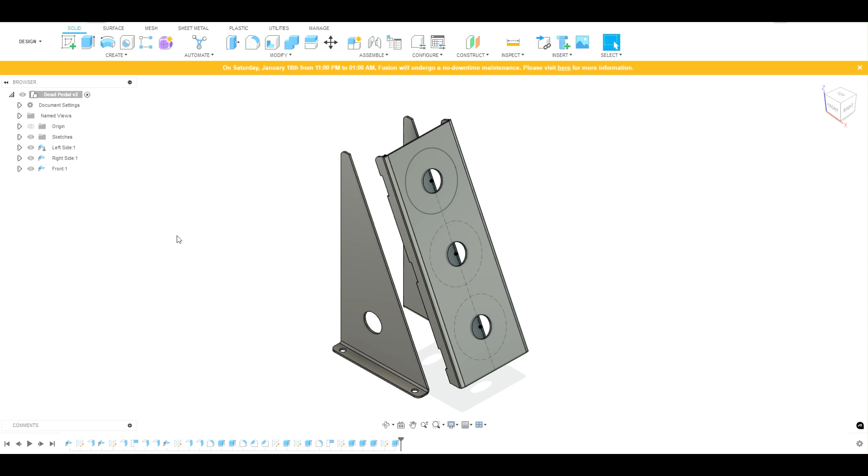All right, so we're going to unfold all of these pieces. What we have to do first is go through every one of them. Click on the component that you want to start with, make sure you're in the sheet metal tab, modify, unfold, okay?

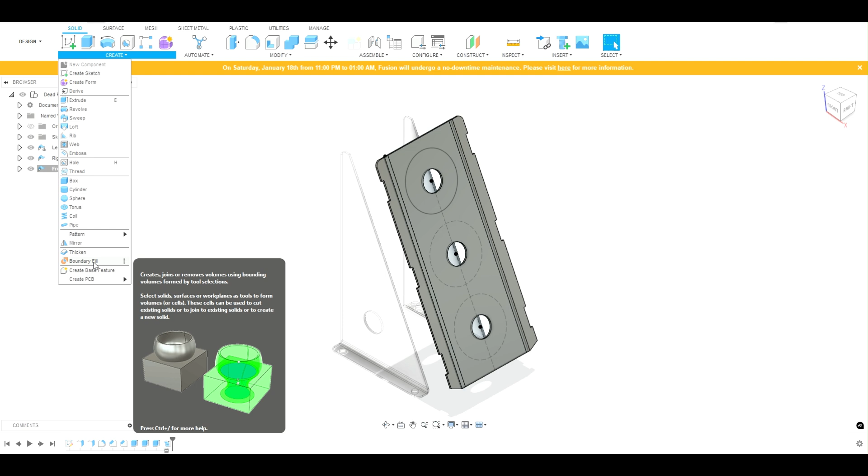Then we have to go over to solid, click on create, boundary fill, highlight the component, click it. Now we have to select the cells, create new component, hit OK. This will be the first component, right?

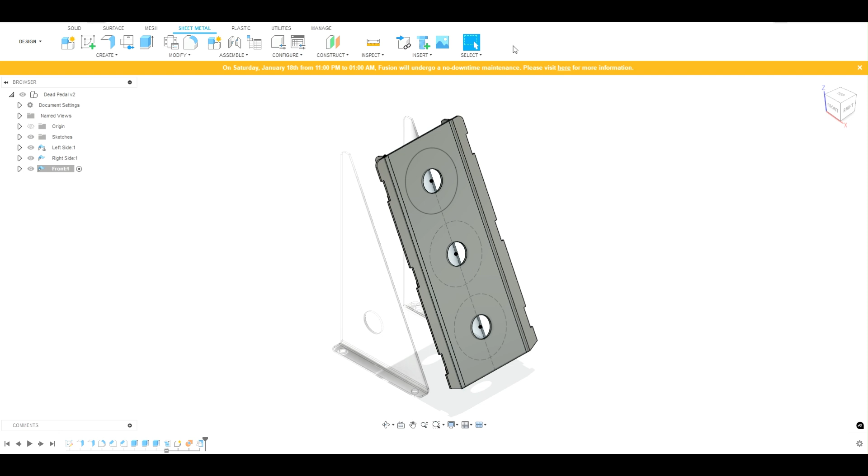Go back to sheet metal, refold the faces, otherwise it'll complain later. Then we're going to go on to the second component. We're just going to repeat this process 3 times, right? So back up to sheet metal.

We're going to go to modify. Sheet metal, modify, sorry about that. Unfold. Unfold all bends, select component.

Go back to solid, boundary fill, highlight the component, select the cells, not remove tools, hit OK, or new component, hit OK. Back to sheet metal, refold.

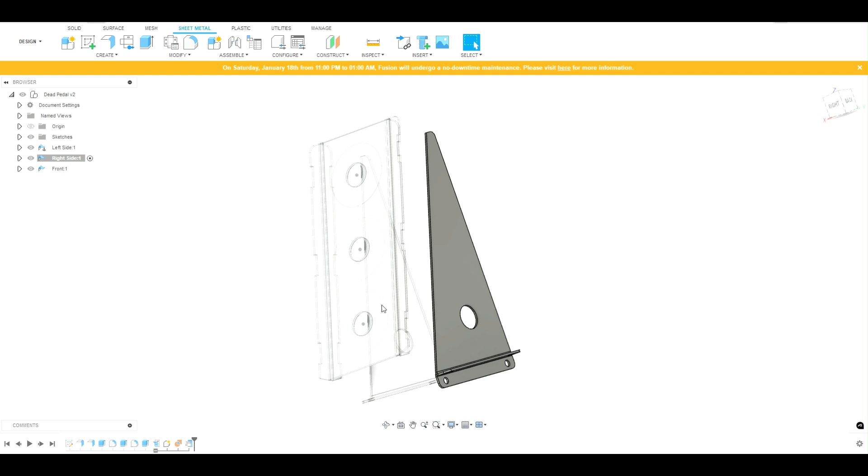And we're going to go on to the third component. Highlight that, go to sheet metal, modify, unfold. Click on the surface that you want stationary. Make sure all the bends are highlighted.

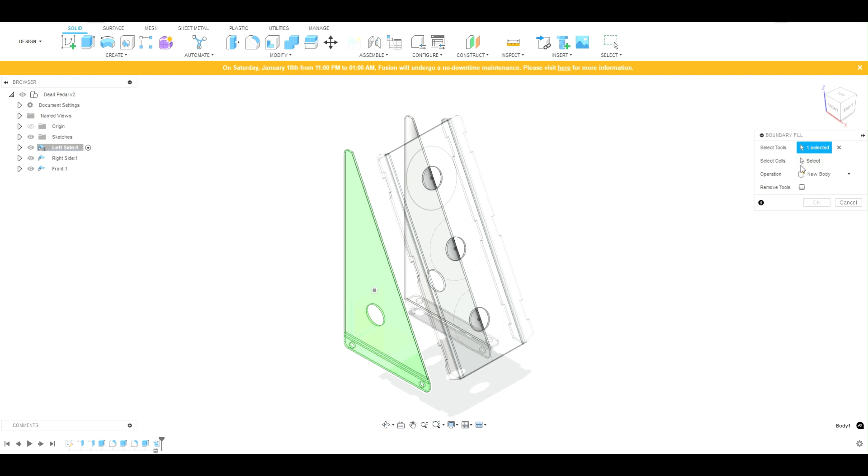Go back to solid, create, boundary fill, select the component, select the cells, create that into a new component.

There, okay. Now what I want to do here actually is go back, first refold the faces. I want to go back and, there's two pieces on each one.

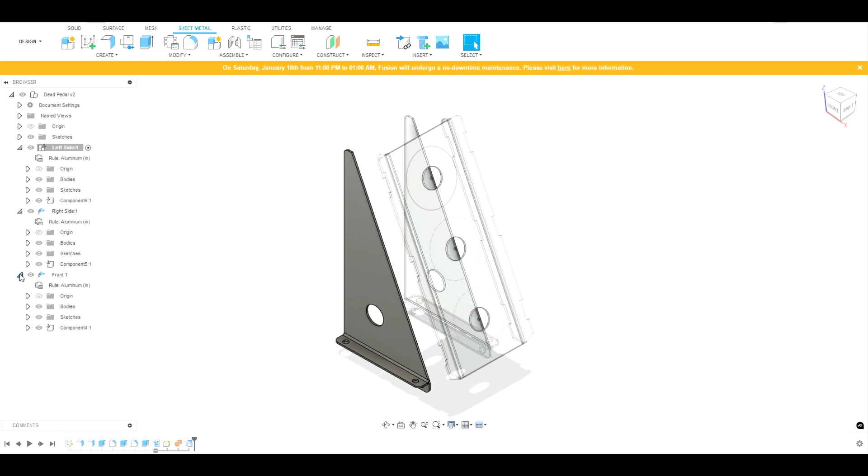So we want to hide the bodies. That's right, I said hide the bodies. And those are the ones, the components that have the bends in them. So let's hide those. All right.

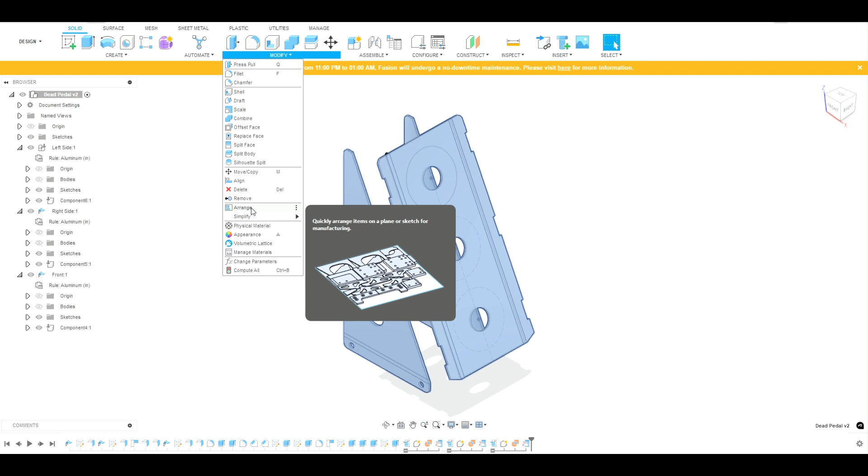And then what we have to do is go up here and get everything visible. Go to modify, go to arrange, and then we're going to select each component.

Sorry, my mouse is kind of giving me problems here. I'm also fairly new to Fusion.

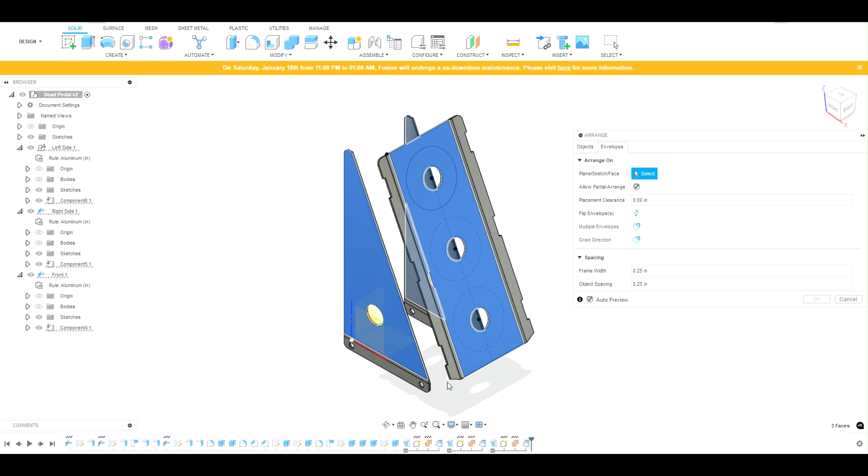So then we're going to go to the envelopes tab, and we need to select a plane. It's kind of hidden down in there, so I have to rotate this thing around. Of course, my mouse is giving me problems right now.

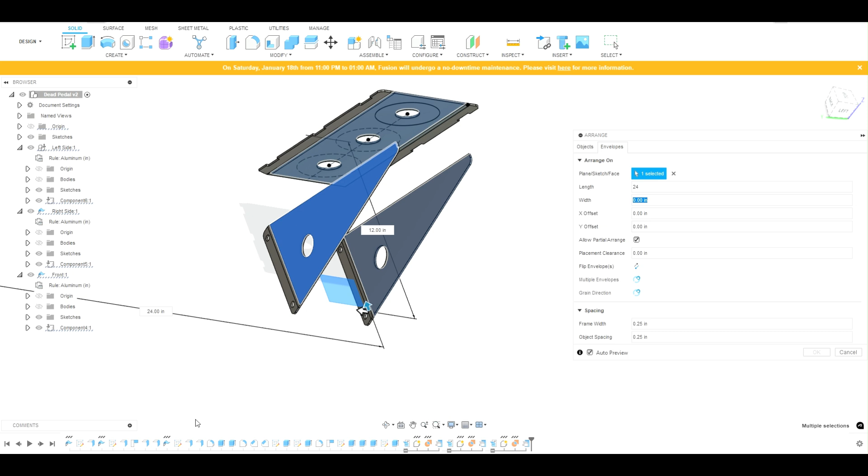We want everything to be on a flat plane because we're going to CNC cut this. And then I have to specify the size here. It's just coming out of a sheet, I'm just going to put 24 by 24. It's not, but if you do have a specific size, that's where you would enter it, hit OK. It shows you what the nesting is going to look like. Hit OK.

And then I'm just going to move these 3 components out of the way, just because it will make the CAM process a little less confusing. Bear with me here just a second.

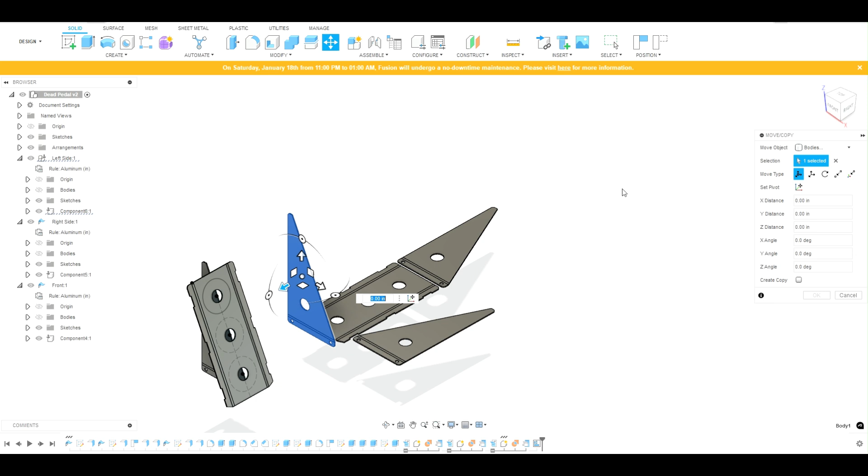All right, this last component here is grounded. I'm going to have to unground it. I think, yeah, it's moving the flat piece. So I got to go up here real quick. Unground. Now I can move it.

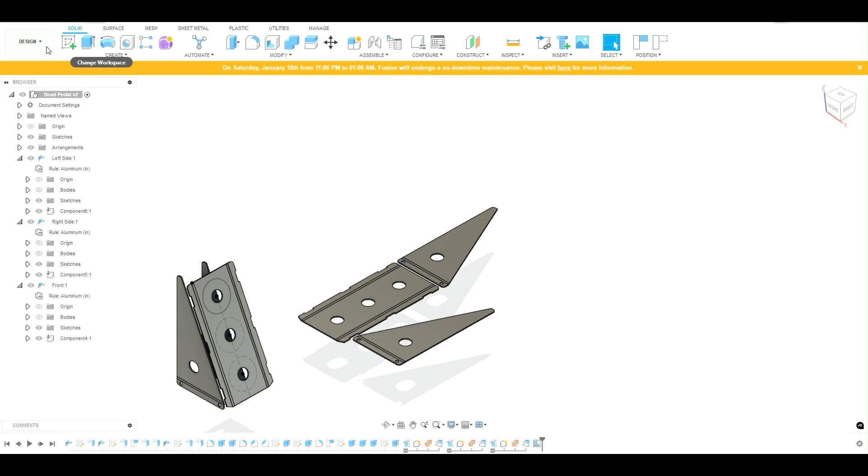I said, I'm learning Fusion 360 also. Shout out to a guy on Facebook that kind of walked me through how to do this process. It's on the Fusion 360 for beginners page.

All right, now I'm doing my setup here in CAM. I don't want all of those, so I'm going to go in there and just select the 3 models that I want, hit OK. And then this could be a whole nother video by itself, but yeah, I have my 2D profile, and I'm just going to select the silhouettes.

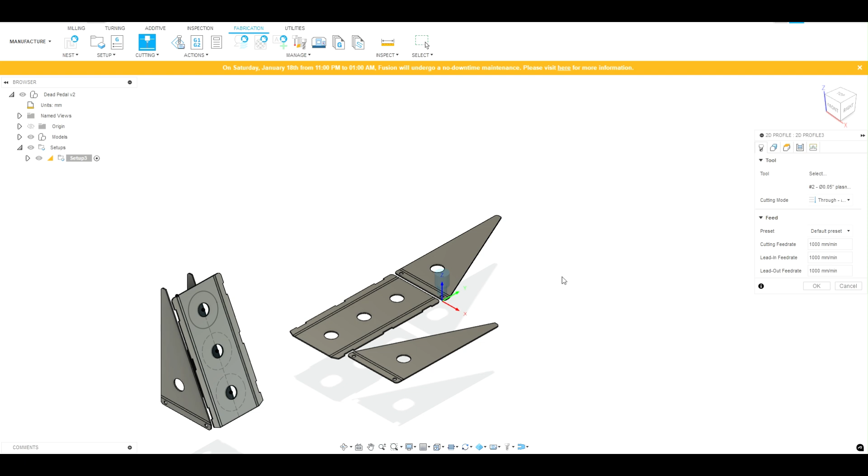First, I have to pick the tool, plasma cutter. Select silhouette, just hit OK right here. I have my start and stops already pre-programmed in there. But yeah, just checking that.

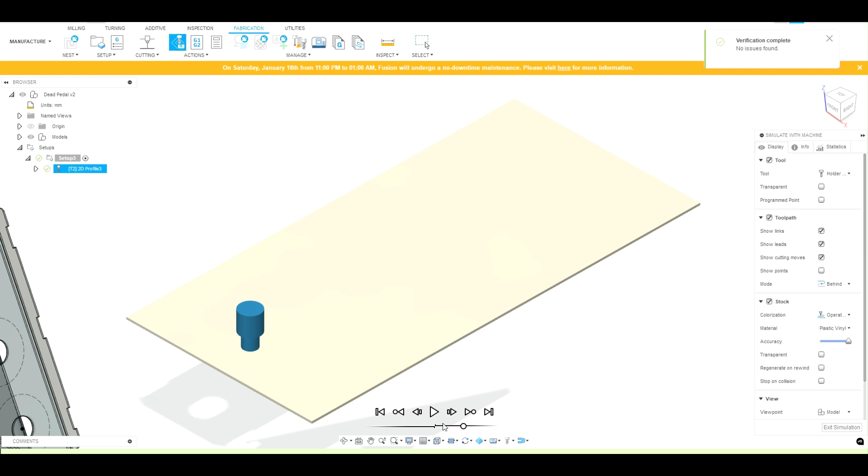Not always, but sometimes I like to run it through the simulator just to see what the cutting operation is going to look like, make sure my starts and stops are on the right side of the line. It's also just kind of fun to watch.